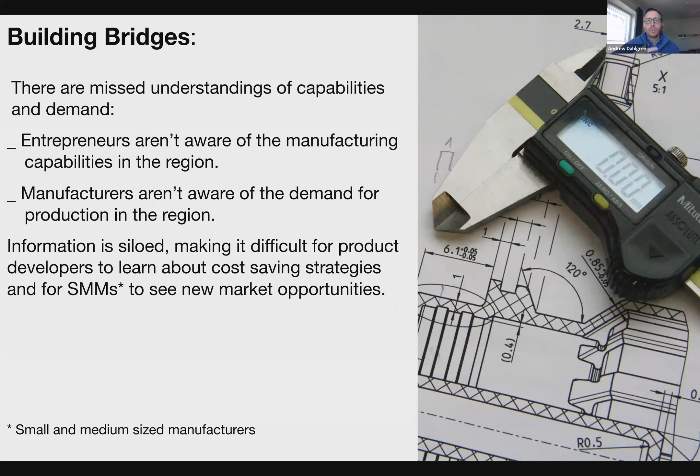Manufacturing is a huge topic, and it's something we obviously can't cover completely in just an hour or hour and a half. So what I'm presenting here is an introduction to a lot of different things, which hopefully will answer some of your immediate questions. And if anything, it'll give you a seed of an idea to do more research or reach out to me. I'll be sharing my contact information and possible next steps at the end of the presentation.

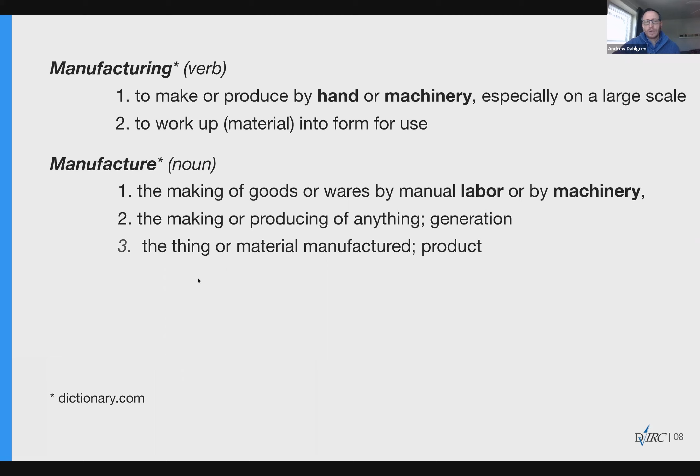What I like to do is define manufacturing as the use of technology and labor to transform raw and/or recycled materials into finished goods. If we acknowledge that technology and labor make up the two things needed to do manufacturing, we can get a better understanding of different strategies to use in order to manufacture in different ways.

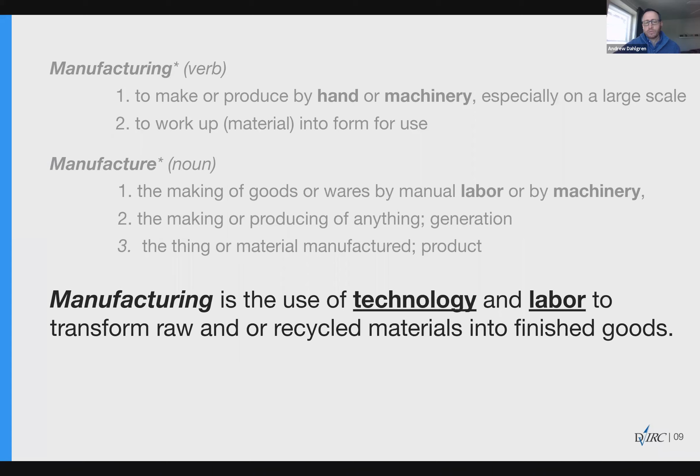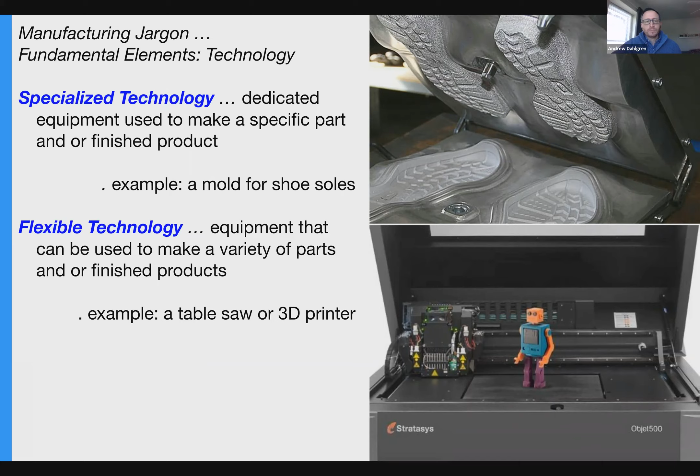We also hear the phrase legacy or traditional technology. That means production technology that's been used for many generations and is still in use today—any manufacturing process that's been around for hundreds of years is an example of traditional technology. Even technologies that are, say, 30 years old are still considered traditional technology. Die cutting, injection molding, cutting and sewing of apparel, metal stamping, table saws, chop saws, etc.—all those are examples of traditional technology. This is important to know because some manufacturers only have traditional technology, so to work with them you have to make sure the production processes you need fit this older manufacturing process.

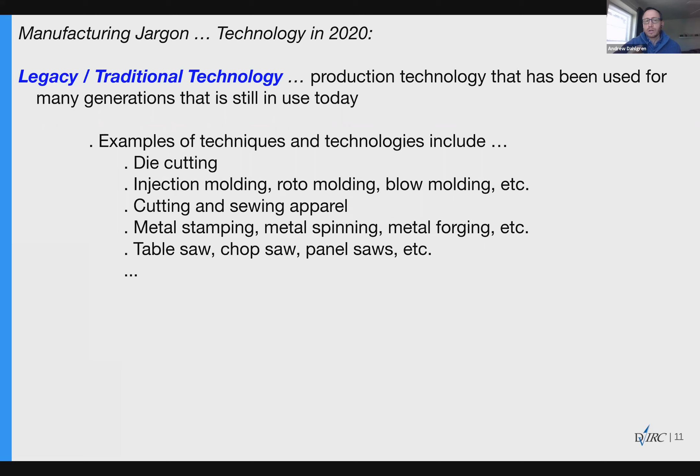Another phrase we hear a lot is advanced manufacturing technology, or AMT for short. Basically that's defined as innovative and cutting edge contemporary production technology. We hear phrases like Industry 4.0, subtractive and additive manufacturing. Ultimately, AMT is technology that's relatively new to the manufacturing world, and we don't see a lot of manufacturers investing heavily in it, especially those with a lot of traditional technology. Some innovators and entrepreneurs today are making products that can only be made using AMT. So knowing what type of technology you need will influence the type of manufacturing relationships you try to build.

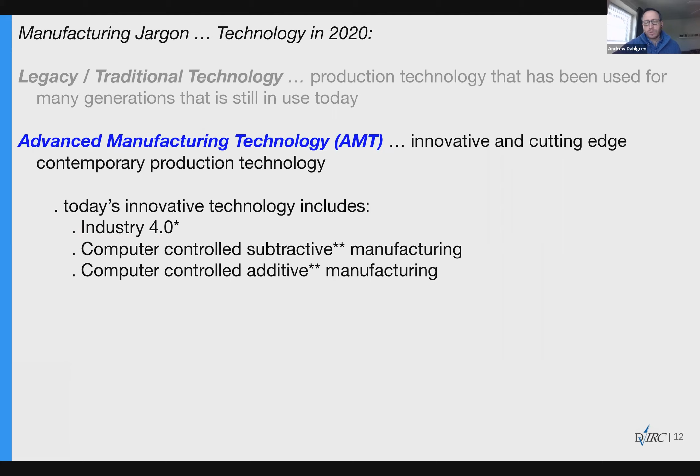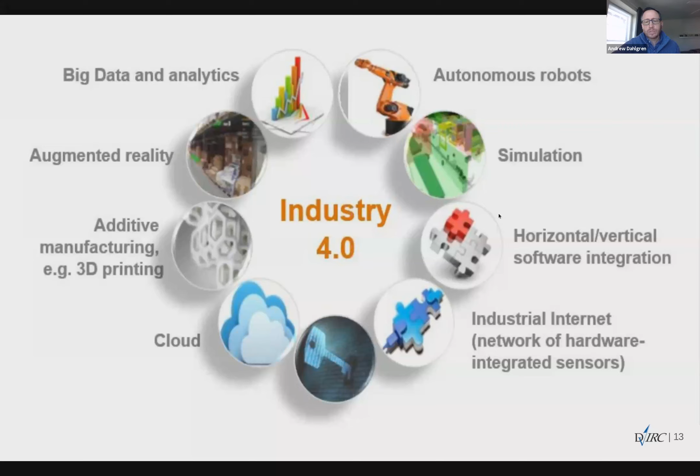Just a quick tangent: some of you might have heard the phrase Industry 4.0, and today that represents a lot of different things. It can include cloud computing, simulation, autonomous robots, etc., all these different bubbles. Now, additive and subtractive manufacturing are the most important parts of Industry 4.0 as it relates to you as an entrepreneur, or someone interested in engaging in conversation with a manufacturer.

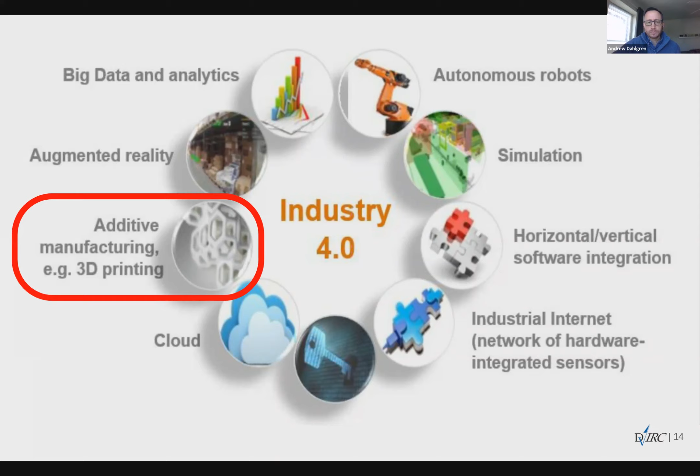To explain additive manufacturing a little: it's the use of technologies that build 3D objects by adding layer upon layer of material, whether that's plastic, concrete, metal, or ceramics. There are lots of different types of additive manufacturing technologies today. The bottom left uses plastic, the bottom right is printing in metal, the top right is printing in ceramics. You don't necessarily need to become an expert in additive manufacturing, but it's potentially something you might need, say, in the prototyping part of product development.

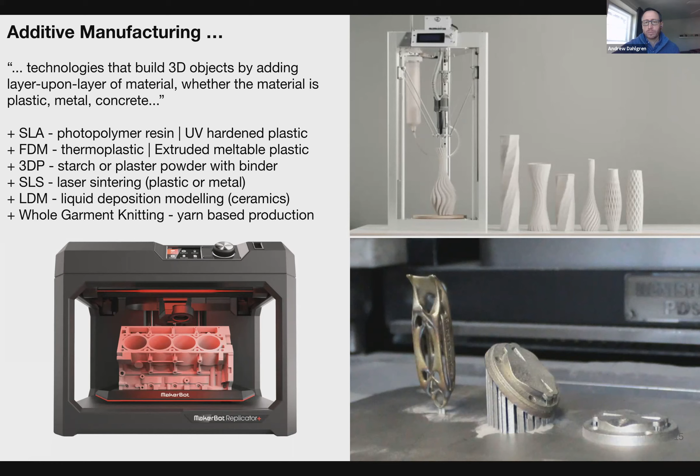Subtractive technology is the process by which 3D objects are constructed by successively cutting material away from a block of material. Today we have all sorts of CNC equipment, which stands for computer numeric control. That means the tool itself can be controlled by a computer, with a human writing the program to tell the machine what to do.

On the bottom right we have a water jet cutter, which in this case is cutting marble, but water jet machines can cut steel, different types of metals, foams, stones, etc. We have 5-axis machine mills that can rotate parts in 3 different axes to make very complex pieces. And on the top right, we have more experimental cutting, using robotic arms with different types of cutting head tools to cut material.

Some of you might already be using these technologies, and some of you might not know about them at all. That's okay—ultimately, we'll give you resources to learn more about these things.

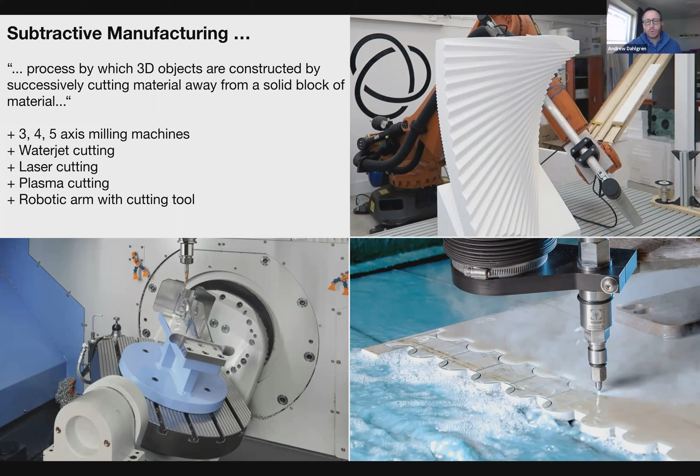If manufacturing is technology plus labor, we can break down labor just a little: labor can be unskilled or skilled. Unskilled, in the traditional sense, means someone trained in only one step of a production process, who typically doesn't have say over how parts are made. Skilled labor is someone trained in all or multiple steps of a production process, with the ability to decide the best way to make parts.

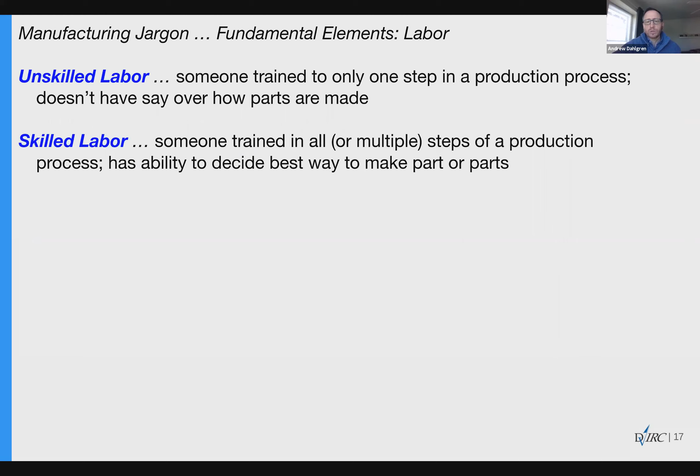When we put these two things together—say specialized or flexible technology, and skilled or unskilled labor—that's when we start to see different ways to define manufacturing that we as entrepreneurs and business owners might need to seek out.

Now, these phrases have no real dictionary or legal definition as to what 'mass produced' means, or 'small batch,' or 'mass customized,' etc. So we use these phrases as a general rule of thumb when engaging in conversation with manufacturers or other parts of the supply chain. Mass produced to one manufacturer might mean 10,000 units, but to another manufacturer, mass-produced could mean 100,000 units, because of the type of technology, labor, and materials they're working with. So I'm sharing these phrases as general descriptions rather than legal or dictionary definitions, because those don't really exist.

We typically talk about mass-produced objects when referring to high quantities of identical products. Small batch is used for smaller quantities of identical products. Mass customization means a slight variation of a product—for example, allowing the customer to pick a color, or pick an image to be engraved on a surface. Those are examples of slight variations from product to product. Craft or artisanal production is what we consider one-off or very low quantities of identical products.

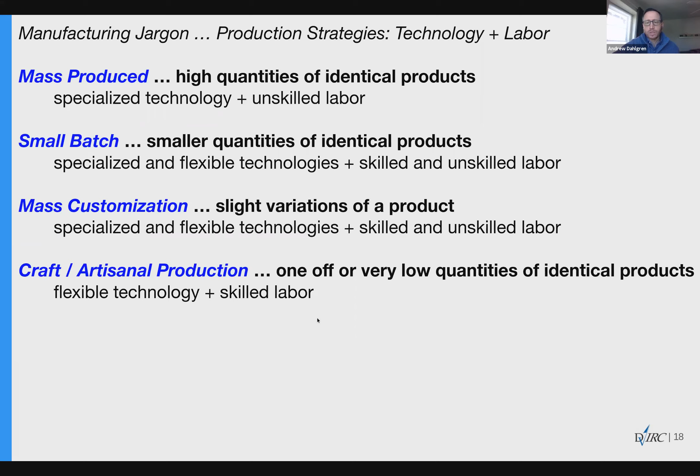On the other side of the conversation, in order to engage with manufacturing, we have to be aware of certain design language and concepts. Iteration is a term that means we're beyond a rough concept early on, as in the phrase an early design iteration. It's important to know when you're talking to a manufacturer where you are in your product development—are you still at an iteration stage looking for feedback, getting a prototype made, or trying to get a run of units produced?

Even within the prototype realm, there are different types, like looks-like prototypes, which might not have any function but give us a general size, shape, and material that we're making something out of. A works-like prototype is something that actually functions the way we want it to, even if it might not be fully aesthetically right.

In certain industries, like textiles, they use specific words—sample in the textile industry is used the way we'd say prototype in other sectors. Finally, a proof of concept is typically a prototype that has some but not all details, usually used to do user testing or to show potential investors what the concept is and how it works.

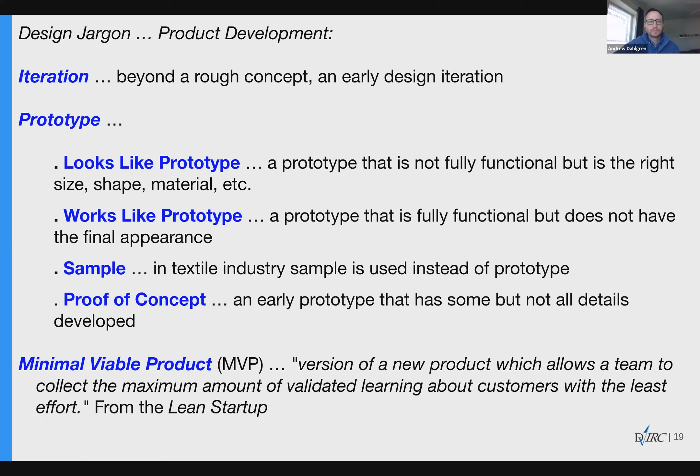The last piece of jargon to know, with the entrepreneurial mindset in mind, is understanding what type of manufacturing you're interested in taking on. For the most part, you're going to look for what's called a contract manufacturer—a company you hire to produce your product for you, as compared to establishing your own in-house production capabilities.

If you envision building a business doing in-house manufacturing, you can totally do it, and there are resources and experts out there who can help you identify the right machinery and equipment. But I think the majority of entrepreneurs are more interested, especially at the beginning of business development, in seeking out relationships with contract manufacturers.

It's important to know there are two types of contract manufacturers: an original equipment manufacturer, or OEM, which typically needs you to bring them specified and finished designs, versus an ODM, or original design manufacturer, which typically has multiple services under one roof—they could work with you to design, engineer, and then also produce the part.

There are lots of different questions you can ask yourself as to which one you'd rather work with, an OEM or ODM—we could get to that as well. But ultimately you can think about this as what skill set you might already have in your team and business, and which expertise you want to build through the relationship.

Okay, so I realize I'm giving you a lot of information very quickly, and that's only ultimately because manufacturing is such a big topic and a big kind of industry, and it also is, you could both talk about it in generic terms, but also with individual businesses, it gets very specific very quickly.

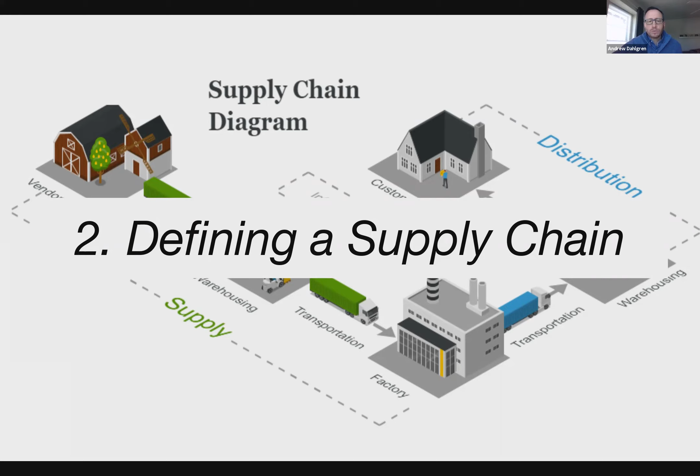Okay, so part 2, what is a supply chain? A supply chain, again, could be defined in lots of different ways. So just kind of generally speaking, a supply chain includes the flow of all information, products, materials, and funds between different stages of creating and selling a product to the end user.

A lot of you maybe have seen a supply chain diagram or kind of understand a supply chain in this kind of visual sense, where we can think about all the steps it takes to manufacture a product, from where the raw material is, all the way through how it's manufactured, potentially packaged, warehoused, etc.

This can be a useful tool for people to think about what the supply chain looks like. If you're familiar with the business model canvas, you might be familiar with key relationships and key resources. In essence, those could be mapped onto your supply chain as well.

It's important to point out that the supply chain can vary from company to company, as well as from product to product. Right now it's very specifically called out where, say, manufacturing is separate from assembly, separate from packaging and warehousing.

But depending on your potential partners, packaging and assembly might be under one roof, manufacturing and assembly might be under one roof. Or it might actually be like this, where you're actually dependent on each box representing a different company in the process. You'll see there's also different ways of navigating it.

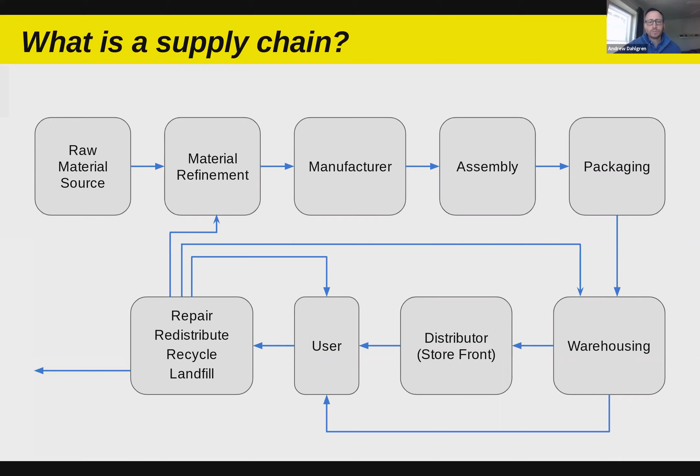Now, it's important to identify that your supply chain depends on where you are in your product development process. So basically, this kind of outlines different places that some of you may be.

Some of you maybe have already produced an initial batch. Others of you are ready just to do prototyping. Some of you might actually have a supply chain somewhere else in the world and you want to kind of move it to someplace local. So it's always important to ask yourself where you are in your product development, because that's going to affect the supply chain you want to create.

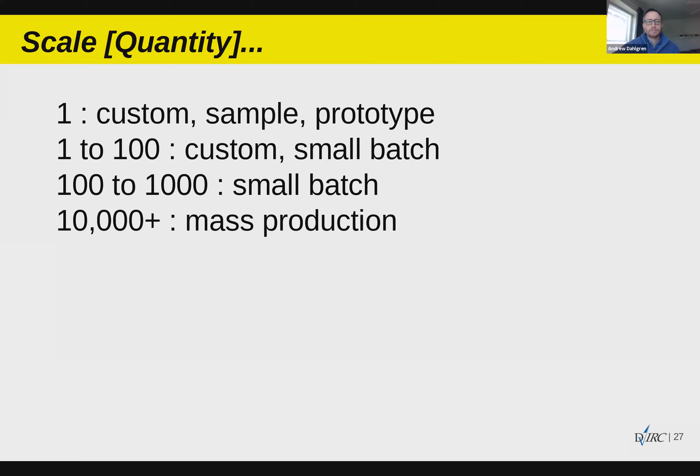Size in terms of dimension is also very important. There's manufacturing with metal that happens at all different scales. For example, you can have a company that specializes in manufacturing jewelry, and another that specializes in building prefab architecture, and both use metal. But the manufacturer of prefab architecture won't be able to respond if you're working at the jewelry scale. Again, there aren't any hard definitions for what's handheld size, tabletop, etc., but knowing what size object you're trying to make will impact who you can find to manufacture your product.

Knowing what type of materials you want to use matters too. Is it an off-the-shelf material that anybody can purchase? Or is it a unique or hard to find material, or a customized made-to-order material? There are some manufacturers that will only use materials they supply, so if you have a very unique material, it will impact whether you can work with that manufacturer or not. Sometimes manufacturers will help you source materials, but in other cases you might have to do your own sourcing, supplying, and shipping to the manufacturer.

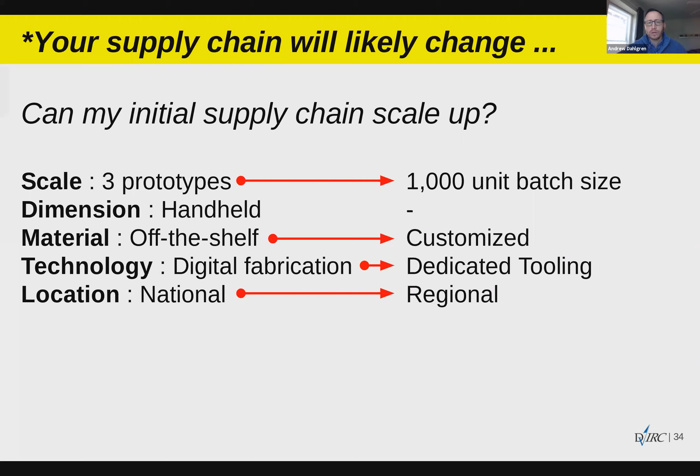We get questions from entrepreneurs about going it alone and owning their own production, and it can be done. Companies do successfully take on in-house manufacturing, or they do a hybrid where they depend on part of the supply chain being made by other people but then invest in their own in-house production. Ultimately, as an entrepreneur, you have to ask yourself what part you want to take on, because in-house production means owning new technology purchases, managing materials, overseeing workforce, etc. It changes the dynamic of your business, doing in-house manufacturing versus outsourcing it.

All right, so I'll pause there and see what questions are coming up.

Somebody shared the question: do flexible technologies wear out faster, i.e. do you have to build in obsolescence if you buy it, or make it reliable by contacting a manufacturer? Flexible technologies come in a range of durability. For example, with 3D printing, considered one of the most flexible technologies, there are consumer 3D printers for household use that can be very cheap, and industrial scale 3D printers. The consumable parts of industrial equipment are more durable. An at-home printer could wear out quickly depending on how frequently you maintain and run it, but industrial equipment is designed to run 24/7 and has a much longer lifespan. So there's not really a rule of thumb that flexible technology wears out faster - it comes down to whether the equipment is designed for high production runs or not.

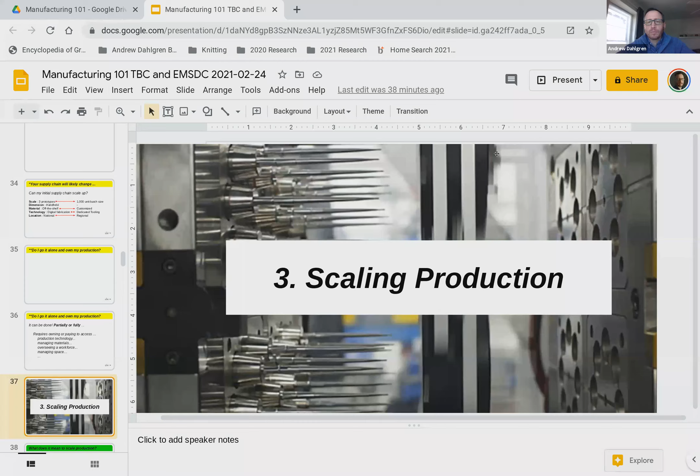Okay, so scaling production is the next part of the presentation. Ultimately, what do I mean by scaling production? Generically, it means increasing the number of units being made by utilizing more efficient ways of making more units more rapidly. The most important thing to keep in mind is that typically we talk about scaling from the lens of getting more efficient at making something.

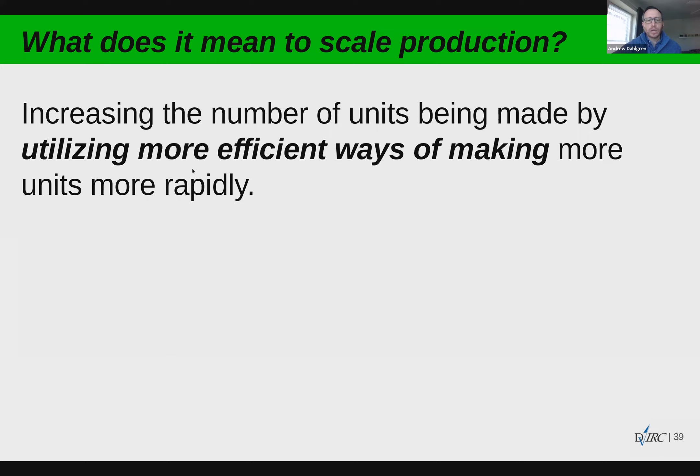Going from, say, purchasing 20 units to 40 to 60 - in essence, that's not quite scaling in this way. Yes, you're placing more orders, but scaling, traditionally through the lens of manufacturing and business development, is really about how do we make things more efficiently. This has traditionally been done by transitioning from flexible technology to dedicated technology, from skilled handwork to mechanized dedicated technology. The big motivating factor is that if we can find more efficient ways of making something, we can make the production costs go down.

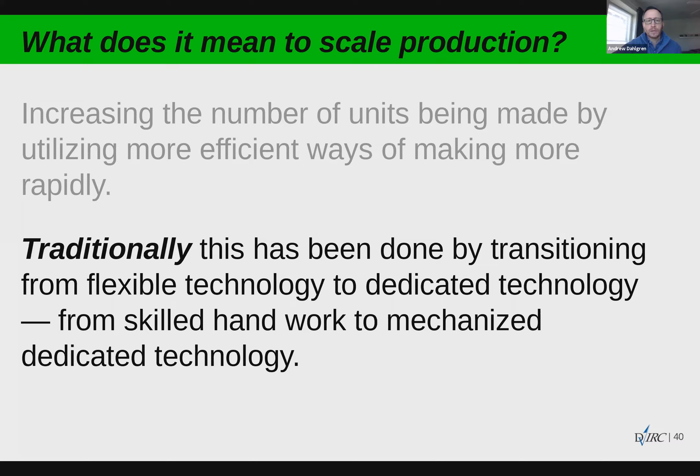So we decide to scale up production when we think there's an opportunity to lower that unit price. I'm going to share two examples of what it looks like to scale technologies in manufacturing. The first is something simple like cutting leather for shoes. We can find people today who use templates and actually cut leather by hand. But if we want to increase efficiency, we would jump up to using a die cutting process.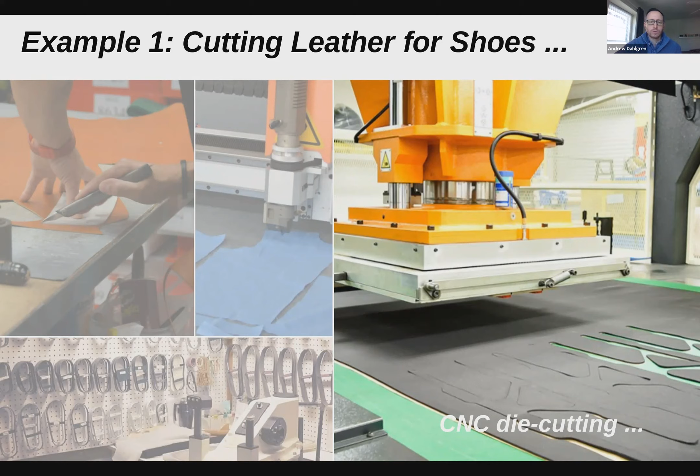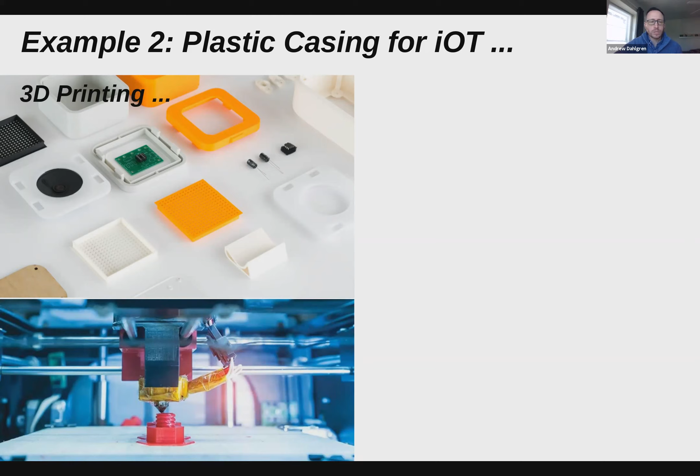Another example of scaling production is trying to create a plastic casing for an Internet of Things or smart object. Again, we can start with a flexible technology like 3D printing, and then scale up and gain some efficiencies by using 3D printed molds for low run injection molding. The injection molding process allows us to make parts in seconds as compared to maybe minutes or even hours with some 3D printers.

In some cases, depending on the design of the mold, we might even be able to make multiple parts in seconds. The low run injection molding is actually designed to be efficient to a certain scale, meaning this mold might work well for, say, 1,000 units, but then after that, you have to invest in another mold.

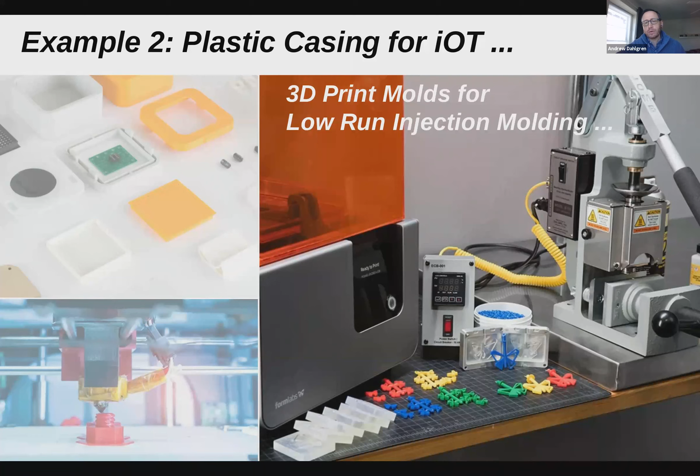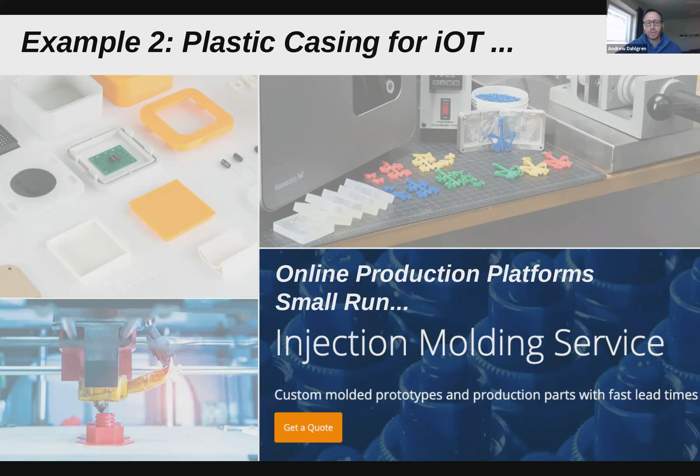We can scale up and utilize what's called an online production platform. I'll talk more about this later on, but ultimately you can outsource production to a company and they can do small runs. Again, they create an efficiency because they invest in tooling, but there's a tipping point where at certain run sizes, they lose efficiency.

And then lastly, you can go all the way up to an injection molding factory, which can have multiple machines with multiple dies running simultaneously, meaning you can make thousands of parts potentially in a week or even just days.

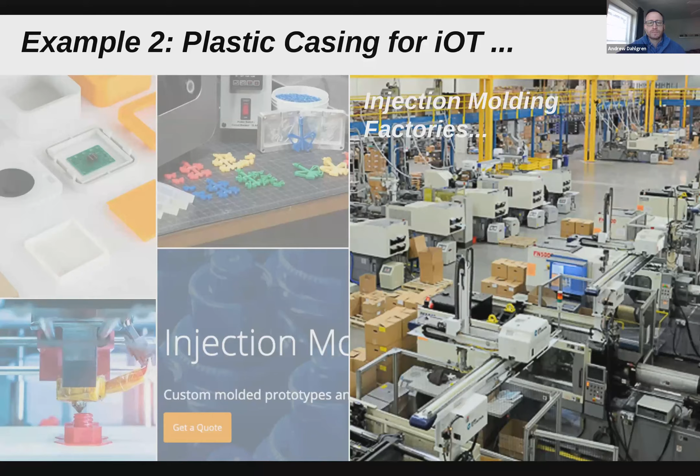We get the question a lot from entrepreneurs: when do I scale production, and how do I know when to jump and scale? A lot of this is going to be driven by consumer demand. Let's say you've had lots of success and now you need to start making larger batches—that's going to require you to think about more efficient ways of manufacturing. That could also force you to develop a different supply chain, because some supply chain partners work at one scale and not another.

You might need to jump in scale in order to create a lower price point. Through market research, you might realize that your consumer has a kind of ideal price point, and you might not be able to reach that initial price point at the small batch or handmade scale. In that case, you might be forced to jump in scale earlier in the process in order to drive that price down. And lastly, there are times where you just can't find technologies that work at a small scale—we don't necessarily have efficient ways of making small runs of something.

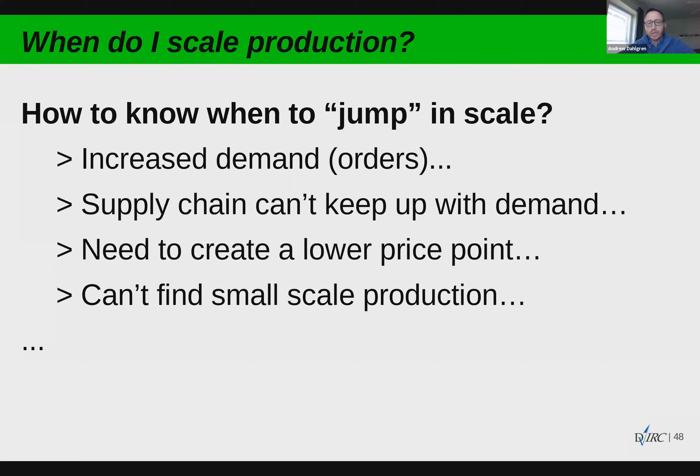Depending on your specific product or market, you might jump in scale in ways other entrepreneurs wouldn't. In order to scale, you need to be prepared—as in, you potentially need access to more capital. That capital could be more sales and more revenue, or it could be an investment, because you might need to invest in new technologies, for example.

You also potentially need a different supply chain, and you might need to go through the process of part redesign or design for manufacturing. Let's say you started out by making small runs using 3D printers - the file needed to run the 3D printer should be optimized for that. If you're going to go from 3D printing to injection molding, in order for that part to be made using injection molding, you're going to have different details. So there's a translation that has to happen as you transition from one manufacturing process to another. It's important to be aware of this from a cost point of view, because it might mean hiring an engineer or finding a contract manufacturer to do that part redesign. It might also impact how you think about your early design, knowing that if you want to scale up, it has to work a certain way, even if you are still going to use 3D printing.

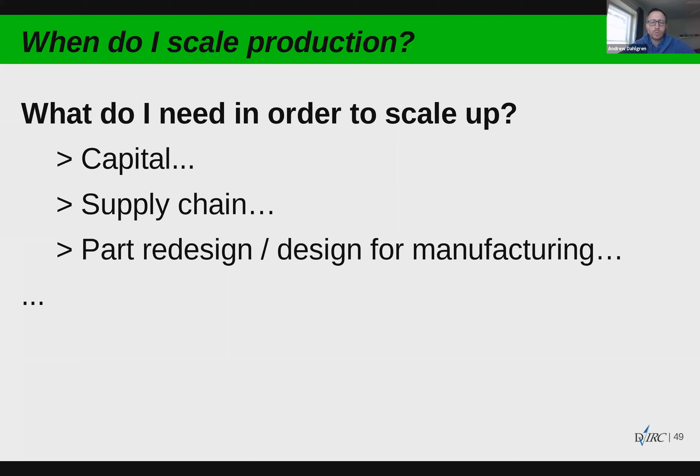Another question that comes up around scaling is, how do I price my product? Do I price it for the scaled production or the small run unit price? The shorter answer is it depends on the market. If your price point is high at the beginning when you're doing small runs, and it's going to drop over time because you gain efficiency at a larger scale, that typically is seen as positive by your market - they're likely to be happy to spend less in the future.

Whereas if you set your price low because you're 3D printing it yourself, or doing a cut and sew product in-house, and you price it for what you do it at versus what a manufacturer could do it at, if your price jumps up later, it might put off your initial market and you may not get a return buyer. So ultimately, knowing what your market will bear is important. Maybe you start with one market at one scale, knowing that as you scale up, it might lead to a different market and different opportunity.

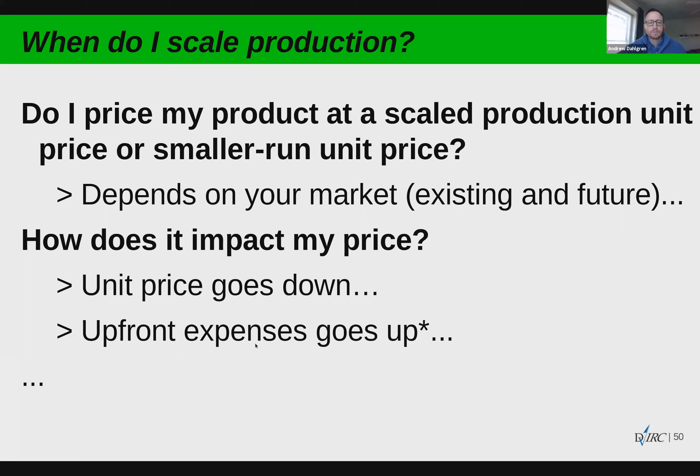How does scaling impact the price? Ideally your unit price goes down, but it does mean you're going to have more upfront expenses. Those upfront expenses are attached to things like part redesign and potentially purchasing dedicated tooling. You're going to have to afford larger material purchases, payments to contract manufacturers, larger shipping fees, et cetera. So a general rule of thumb is that scaled production requires more money up front, but because you're lowering the unit price, you gain a bigger profit per unit sold in the future.

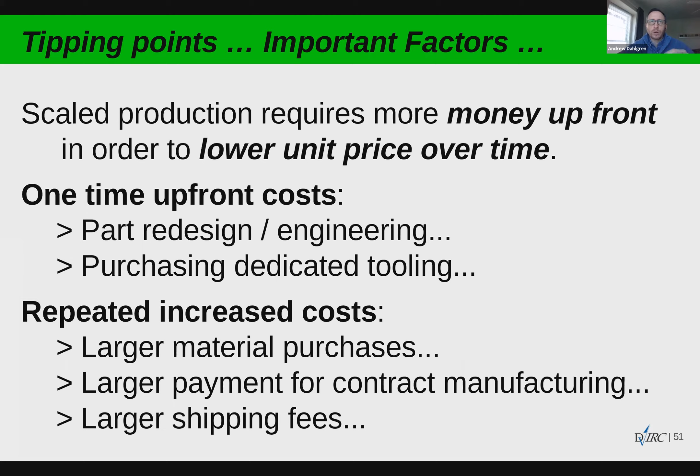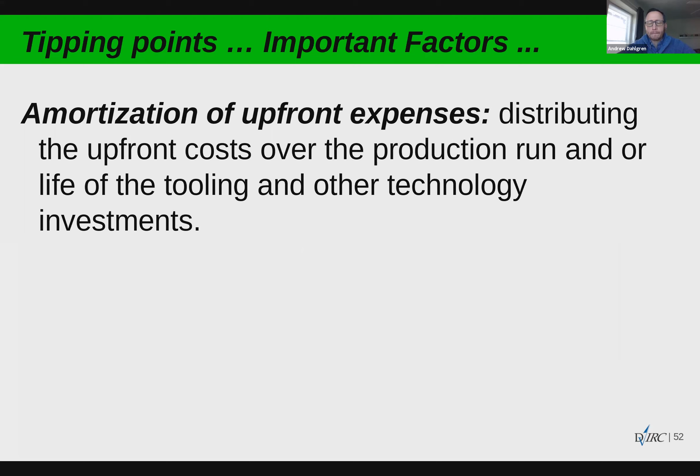An important concept here is amortization of upfront costs, which means distributing the upfront costs over the production run and/or life of the tooling. A quick example: in injection molding, it's not unheard of for tooling costs to be in the $50,000 range. If we divide that $50,000 purchase over, say, 100,000 units - the lifespan of the tool - we simply add 50 cents to every unit price to recoup the cost. Or option B would be, say we have an initial sales goal of 20,000 units, so we can add $2.50 to the unit price.

Why would we go with B versus A? With B, the idea is that after you've sold 20,000 units, that $2.50 markup, which was going to pay for the tooling, now becomes profit. This is up to every entrepreneur to play with this balance of how to distribute the cost of that tooling over a production run and recoup costs. This can be translated to other things too - it doesn't have to be just tooling. Research and development costs are dealt with this way. Material purchases can be dealt with this way. The important takeaway is this idea of distributing larger upfront costs over production runs.

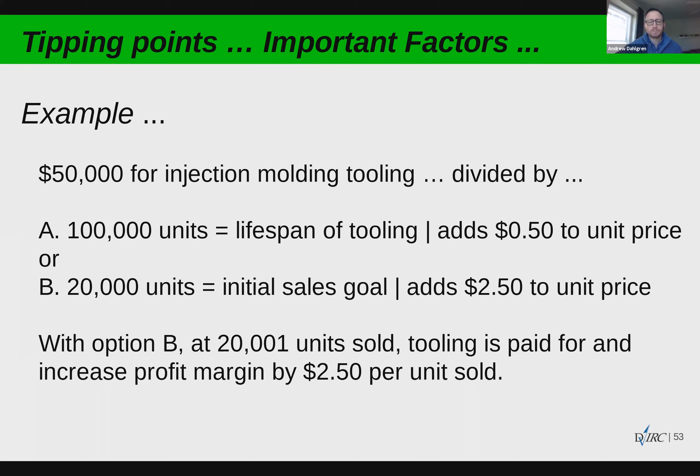Another question we hear a lot is, does my production process translate from one scale to the other? The short answer is it depends. For those in the apparel industry, cut and sew is a process that has yet to be really automated. So if you're cutting and sewing 100 units versus 1,000 to 10,000 units, there still aren't a lot of ways to gain efficiency at scale in sewing. You can gain some efficiency using automated cutting tools and different types of dyeing, et cetera, but ultimately the scaling of the actual sewing process doesn't really scale yet.

If you're using plastics and doing plastic manufacturing, there are definitely levels of scale, from 3D printing to small batch injection molding to high volume levels. Same with metal parts - you can do very small runs through different types of forming processes, but then you could do larger scale manufacturing in metal using stamping and forming.

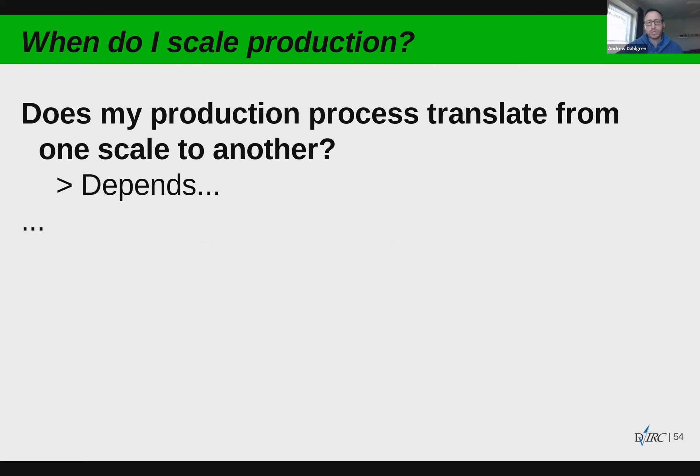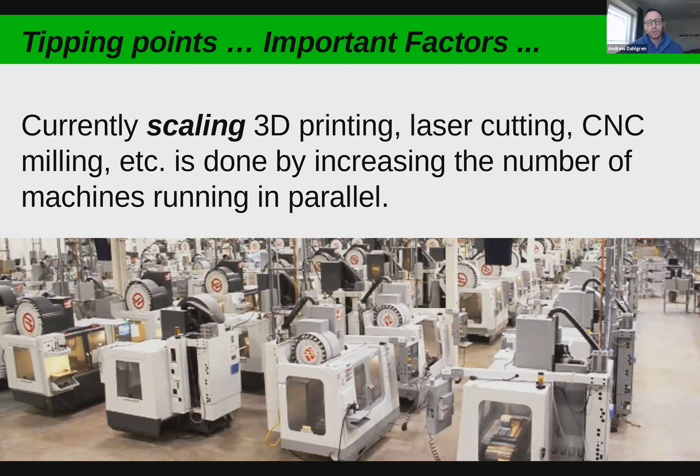In the world of 3D printing, if you want to use 3D printing forever and never switch into, say, injection molding, a lot of people wonder if you can scale with those technologies. As of now, you can't really scale in the traditional sense because you don't get efficiency. Because you're using the same tool from beginning to end through all your production needs, you're not really going to gain efficiency. You might be able to print multiple parts in parallel, but ultimately it's still requiring X number of hours on the machine.

You might get a discount, like a contract manufacturer might discount if you purchase larger orders, but that's still not quite the same as a traditional sense of scaling.

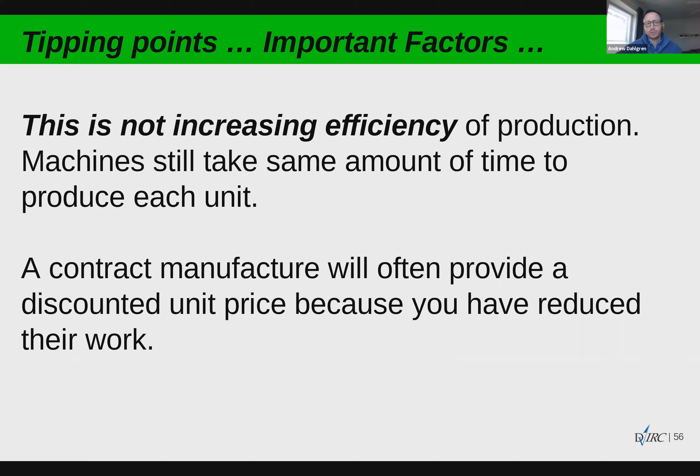Now, if you think you want to scale, it's always important to research future scaled production costs, even when you're starting out, because that's going to help with your pricing and maybe help with avoiding lots of redesign or part redesign. So it's important to research opportunities to also reduce tooling costs.

In some cases, you can work with contract manufacturers, and they might be okay if you allow them to use a tool that you pay for with other customers, then they might actually reduce part of your tooling cost. Vice versa, you might find manufacturers that have tooling in-house that they could apply to your project. It might require you to change your design to meet existing tools that are already available, but it's something to be aware of.

Especially if you're doing packaging for a product, how important is it to you to have your package exactly 100% customized versus using a tool for a box that's slightly bigger, but you can make it work and therefore save tooling costs. If you know you're going to scale or have an interest in scaling, definitely talk to manufacturing experts early on in the process.

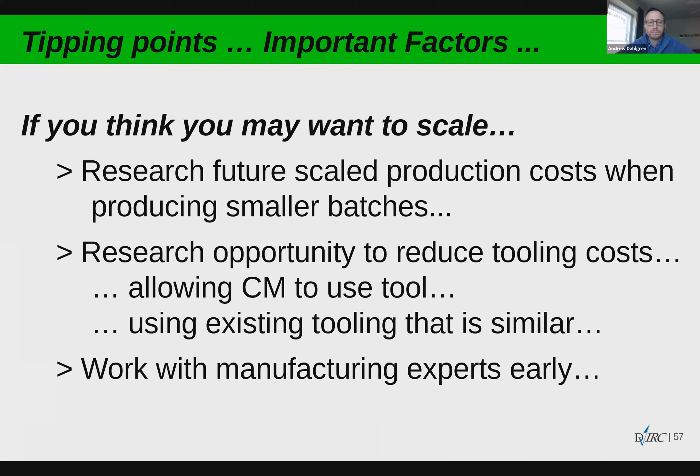It's also important to think about not just navigating the technical aspects like supply and demand, price, and manufacturing capabilities, but as entrepreneurs, you also have to scale yourself in a way. If you've been doing everything yourself in a house or a makerspace, as you scale up, you're going to have to be willing to give over some of that control and depend on other people. So you have to trust your supply chain.

You're going to have to potentially grow your skill set. So if you've been making it yourself the whole time, your skill set might have to change and be more about how do I manage a supply chain. Ultimately too, it might require outgrowing your comfort zone and taking on a different part of business development.

In a more psychological way, scaling means you're outgrowing your dorm room, your kitchen, your basement, your makerspace, wherever you've been working. It's also outgrowing existing connections and collaborators. Some companies work really well at certain sizes, but you might have to leave them in order to go bigger. It also means being prepared to spend more time and resources on different aspects of the business, as well as potentially taking on more responsibility as in debt, employees, customers, etc.

So there is the technical side of scaling, but there's also the psychological and skill set part of scaling.

So one of the most asked questions is, what do I need to talk to a manufacturer? And this is the perfect scenario. If you had all the resources available and you wanted to come up with the best kind of package to communicate with the manufacturer, this is what that could include.

It could include researching manufacturing processes, organizing details about material specifications down to knowing exactly, say if you're using a plastic, the exact plastic you want to use and the specific colors. You'll have gone through a round of iterative drawing and exploration, making models, technical drawings. You'll have created a refined prototype. You'll know how many units you need. You'll have a timeline. You'll have organized questions.

And we know, to be honest, that the perfect scenario is something that very rarely happens. Mostly because as entrepreneurs, we don't necessarily have the skill set to do all these things. We don't have the resources to pay for all these things. Or we don't even know we should do these things.

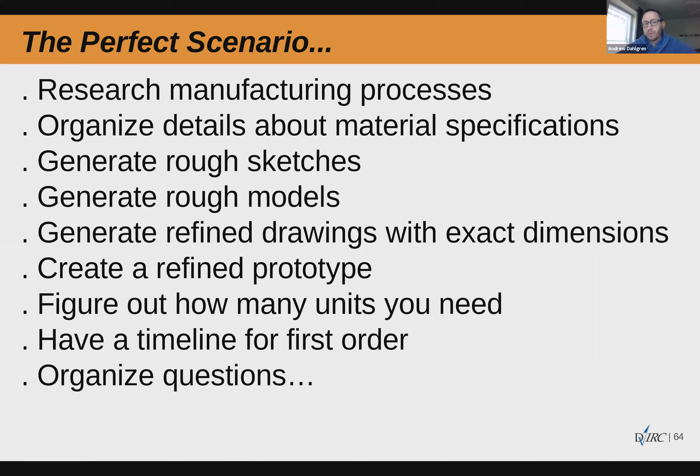So the recommendation is, at the very least, in order to get prepared to talk to a manufacturer, have a rough sketch of what it is. It can be rough. Don't think you have to be an artist or have technical drawing skills, but a rough sketch with some dimensions can actually start the conversation in a way that just trying to describe it verbally just can't.

It's helpful to also find similar products, because sending a picture to a manufacturer saying what I'm trying to do is similar to this but different again gives the manufacturer a sense of understanding of what you're actually asking of them.

You don't have to become a material expert. You can actually describe materials more from a performance requirement. So again, if we're talking apparel, are you talking about a performance being it's lightweight, it wicks sweat, or it's something for cold weather?

If you're building something that needs to be made out of metal, you can describe it in performance requirements as, does it need to be magnetic or not magnetic? Does it need to be in an outdoor setting, an indoor setting? Does it need to be in a sterile environment? So that's what I mean in terms of performance requirements. What does it actually have to do, or where does it have to do its job, can help a manufacturer help you find the right material.

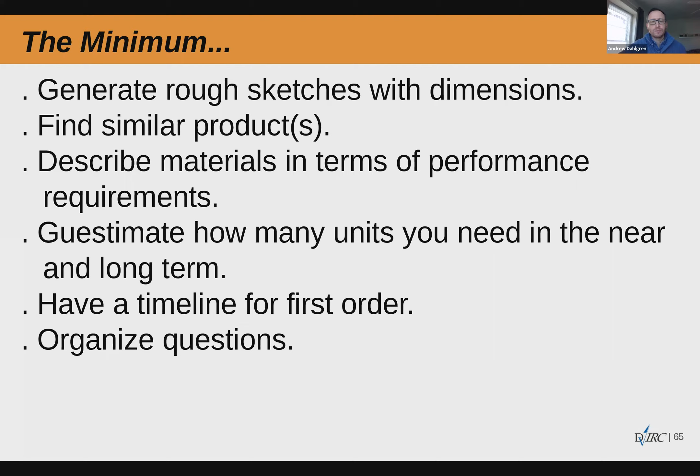Lastly, I want to share some resources that are currently available, and then I'll talk a bit about what next steps I can offer that are also in development.

These are in no particular order. First, a resource to know about is makerspaces. They can be really good for prototyping, for gaining insights about scaling, and for finding experts. In the region, we have a lot of universities that all have different types of makerspaces. Some are accessible by students only, others are open to students and people from the community. Even if you can't access it to use the tools yourself, there are people skilled in making things who could potentially answer some of your questions with getting started.

Outside of universities, NextFab is our local big makerspace network. They have several facilities in the city as well as in Delaware, ranging from 3D printers to other CNC equipment, to more traditional fabrication equipment like woodworking and metalworking. If you're working on a product that's material specific, like wood or clay, going to Philadelphia Woodworking or Clay Studio, both are staffed with experts in their materials and processes.

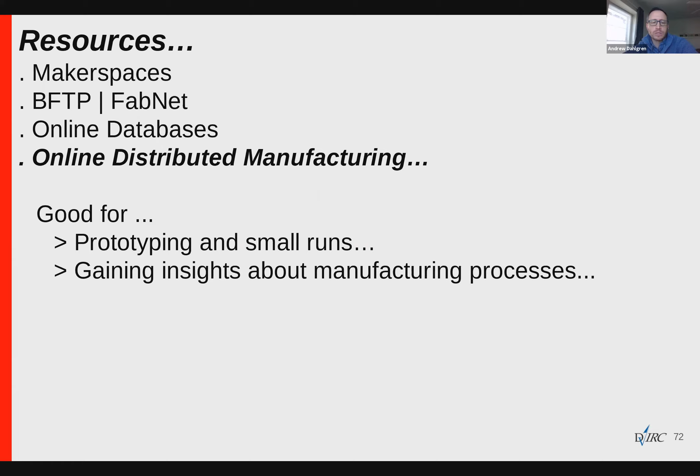The way that these work is you generate a computer file. It could be a 3D model, if it's a 3D object, or it can be a 2D drawing. You basically create an account, upload the file, pick your materials, pick your quantities, and you get back a quote. If that quote works for you, you can basically buy it. Depending on the time frame, within days or weeks, you can actually get units shipped back to your house.

These companies tap into Sourcify, Xometry, and Protolabs. They tap into other manufacturing companies. So for example, if you go to Xometry and upload your part, that part gets sent to hundreds of manufacturers, each of which can bid on it, and then you get a quote that's been a little bit vetted in a way.

All of these websites offer lots of design insights and tutorials, because ultimately what they want to do is educate you as a potential customer of these platforms. So even if you just want to read about injection molding or metal forming, or metal bending, you can go onto Xometry's website and find design guides for making parts using these different manufacturing methods.

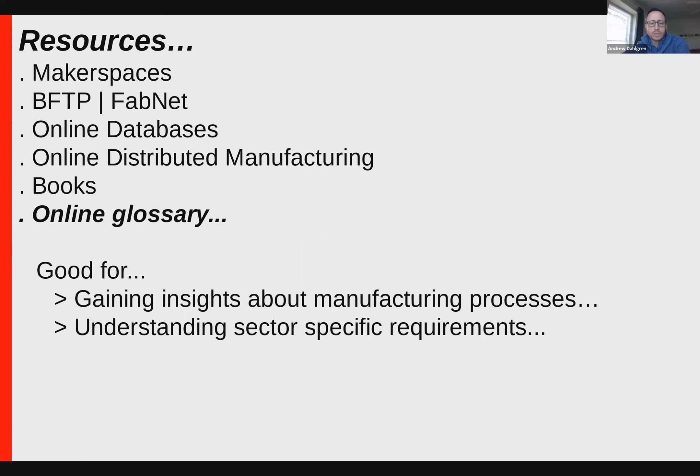Dragon Innovation is an example of a piece of software for managing research and supply chains. They also have a vetted database of manufacturers, and they offer different types of assessment services to help you understand if your design is ready for manufacturing. They also offer a series of videos called Design for Manufacturing, which as an entrepreneur might be helpful for understanding how to design or redesign your product to scale up in manufacturing.

Lastly, word of mouth is also a very important resource. It's good for looking for vetted recommendations. Talk to other entrepreneurs, reach out to other business owners. A lot of times entrepreneurs are open to sharing who they work with and who their supply chain is, or who not to go to. It's a good way to quickly gain insights about who to work with or not. So talk to other people, find other brands making similar products, and see what they might share.